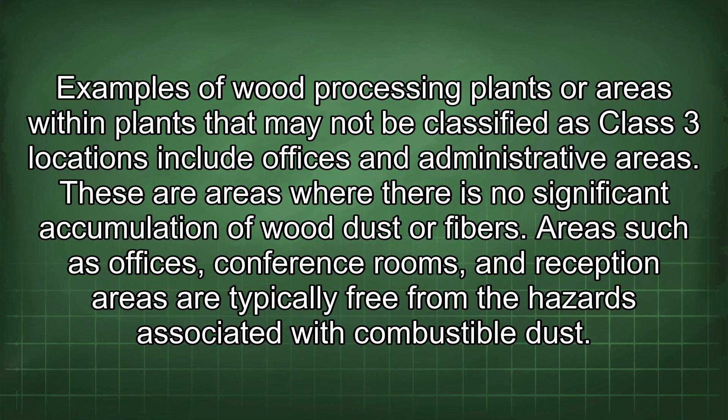However, not all wood processing plants are automatically classified as Class 3 locations. Several factors can influence the classification of a specific area within a wood processing facility. Examples of wood processing plants or areas within plants that may not be classified as Class 3 locations include offices and administrative areas. These are areas where there is no significant accumulation of wood dust or fibers. Areas such as offices, conference rooms, and reception areas are typically free from the hazards associated with combustible dust.

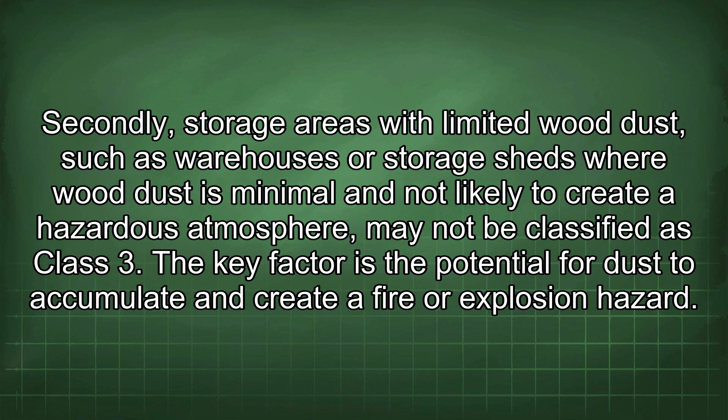Secondly, storage areas with limited wood dust, such as warehouses or storage sheds, where wood dust is minimal and not likely to create a hazardous atmosphere, may not be classified as Class 3. The key factor is the potential for dust to accumulate and create a fire or explosion hazard. Thirdly, woodworking shops with dust collection systems may not be classified as Class 3. Small woodworking shops or classrooms that have effective dust collection systems that prevent the accumulation of airborne dust are examples of this. These systems capture dust at the source, minimizing the risk of it becoming a hazard.

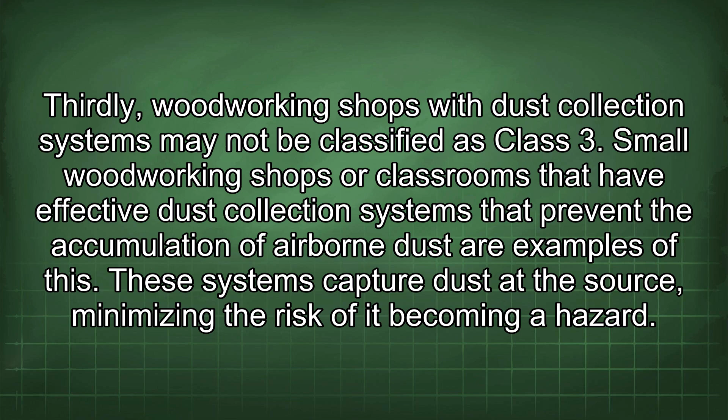Furthermore, sawmills with spark extinguishing systems may not be classified as Class 3. Sawmills that have installed approved spark extinguishing systems on all operating machinery significantly reduce the risk of sparks igniting wood dust. Spark extinguishing systems are designed to detect and suppress sparks before they can ignite combustible materials. It is important to emphasize that the classification of a wood processing plant as a Class 3 location or otherwise depends on the specific conditions and operations of the facility. Several factors must be considered when determining the appropriate classification.

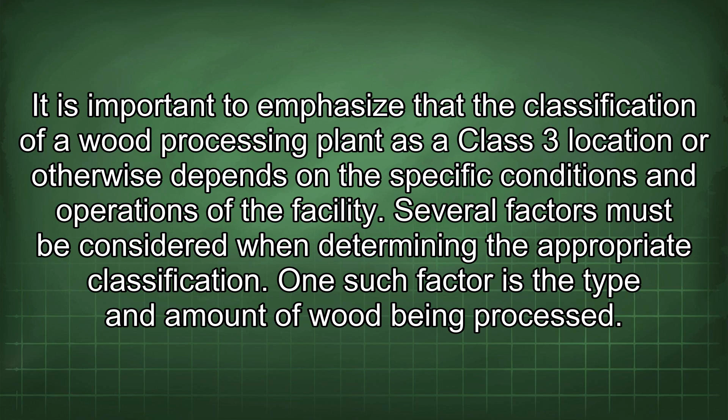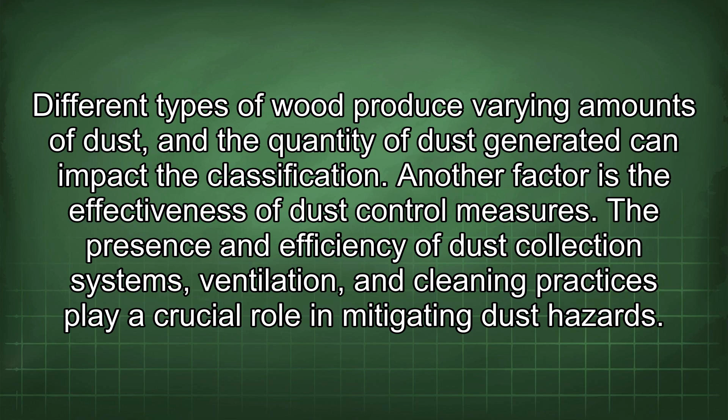One such factor is the type and amount of wood being processed. Different types of wood produce varying amounts of dust, and the quantity of dust generated can impact the classification. Another factor is the effectiveness of dust control measures. The presence and efficiency of dust collection systems, ventilation, and cleaning practices play a crucial role in mitigating dust hazards. The presence of potential ignition sources is another important factor. Electrical equipment, machinery, and other potential sources of ignition must be evaluated to determine the risk of igniting combustible dust. The applicable electrical codes and standards must also be considered. These codes provide specific requirements for electrical equipment and wiring in hazardous locations, including Class 3 locations.

It is strongly recommended to consult with an electrical engineer or qualified electrician to determine the appropriate location classification for a particular plant. These professionals have the expertise to assess the specific conditions and operations of the facility and apply the relevant codes and standards. They can also provide guidance on implementing appropriate safety measures to mitigate the risks associated with combustible dust. In summary, while sawmills are generally considered Class 3 locations, some wood processing plants or areas within plants may not be classified as such. The classification depends on factors such as the presence of dust, the effectiveness of dust control measures, and the presence of ignition sources. Consulting with a qualified professional is essential to ensure accurate classification and implementation of appropriate safety measures.

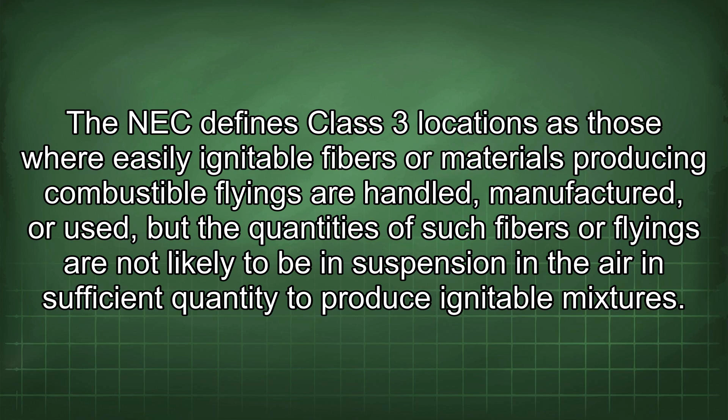The National Electrical Code, or NEC, provides guidelines for electrical installations in hazardous locations, including those with combustible dust. Specifically, Article 500 and subsequent articles address the requirements for Class 3 locations. These requirements cover aspects such as wiring methods, equipment selection, and grounding. The NEC defines Class 3 locations as those where easily ignitable fibers or materials producing combustible flyings are handled, manufactured, or used, but the quantities of such fibers or flyings are not likely to be in suspension in the air in sufficient quantity to produce ignitable mixtures. This distinction is important because it differentiates Class 3 locations from Class 1 and Class 2 locations, which involve flammable gases, vapors, and combustible dust suspended in the air, respectively.

In Class 3 locations, the risk is primarily from the accumulation of fibers or flyings on surfaces, where they can be ignited by heat, sparks, or other sources of ignition. Therefore, the NEC requirements for Class 3 locations focus on preventing the accumulation of these materials and minimizing the risk of ignition. One of the key requirements for Class 3 locations is the use of dust ignition-proof equipment. This type of equipment is designed to prevent the ingress of dust and to contain any internal explosions that may occur due to the presence of combustible dust. Dust ignition-proof equipment is typically enclosed in a robust housing with tight-fitting covers and seals.

Another important requirement is the proper sealing of conduit and fittings. This prevents dust from entering the electrical system and creating a potential ignition hazard.

The NEC also specifies requirements for wiring methods in Class 3 locations. Wiring must be installed in a manner that minimizes the accumulation of dust and prevents it from entering the conductors. Surface wiring is often preferred over concealed wiring, as it allows for easier inspection and cleaning.

Grounding is another critical aspect of electrical safety in Class 3 locations. Proper grounding helps to prevent the buildup of static electricity, which can be a source of ignition for combustible dust. The NEC provides specific requirements for grounding electrical equipment and systems in hazardous locations.

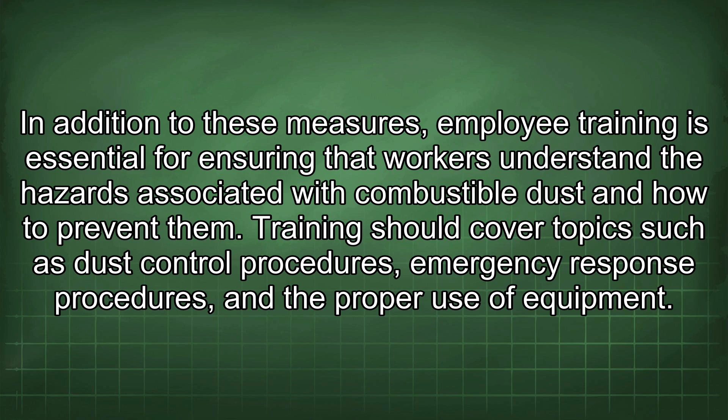It is important to note that the classification of a location as Class 3 or otherwise is not always straightforward. The specific conditions and operations of the facility must be carefully evaluated to determine the appropriate classification. Consulting with an electrical engineer or qualified electrician is essential for ensuring accurate classification and implementation of appropriate safety measures.

These professionals have the expertise to assess the specific conditions and operations of the facility and apply the relevant codes and standards. They can also provide guidance on implementing appropriate safety measures to mitigate the risks associated with combustible dust. The determination of whether a sawmill or any wood processing plant is considered a Class 3 location depends on a thorough assessment of several factors.

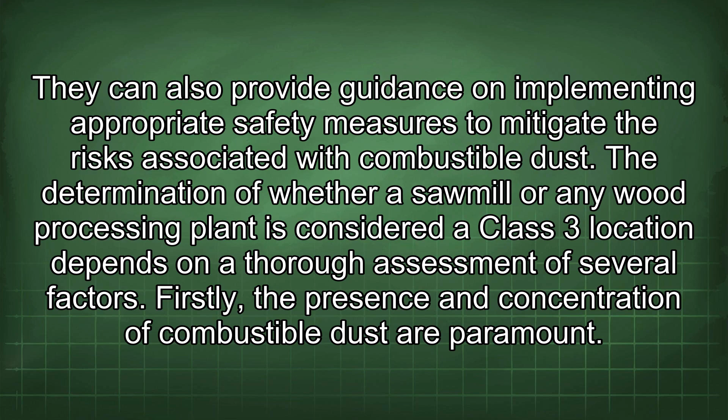Firstly, the presence and concentration of combustible dust are paramount. Class 3 locations, as defined by the National Electrical Code, are areas where easily ignitable fibers or materials producing combustible flyings are handled, manufactured, or used. However, the key distinction is that these fibers or flyings are not likely to be suspended in the air in sufficient quantities to produce ignitable mixtures. Instead, the hazard arises from the accumulation of these materials on surfaces where they can be ignited.

Secondly, the effectiveness of dust control measures plays a critical role. If a wood processing plant implements robust dust collection systems, ventilation, and cleaning practices that effectively minimize the accumulation of dust, the likelihood of the area being classified as Class 3 may decrease. Dust collection systems capture dust at its source, preventing it from becoming airborne and settling on surfaces. Ventilation systems remove dust from the air, reducing its concentration. Regular cleaning removes accumulated dust, preventing it from becoming a fire hazard.

Thirdly, the presence of potential ignition sources is a significant consideration. Electrical equipment, machinery, and other potential sources of ignition must be evaluated to determine the risk of igniting combustible dust. Equipment used in areas with combustible dust should be specifically designed and certified for such environments. This includes dust ignition-proof equipment, which prevents the ingress of dust and contains any internal explosions.

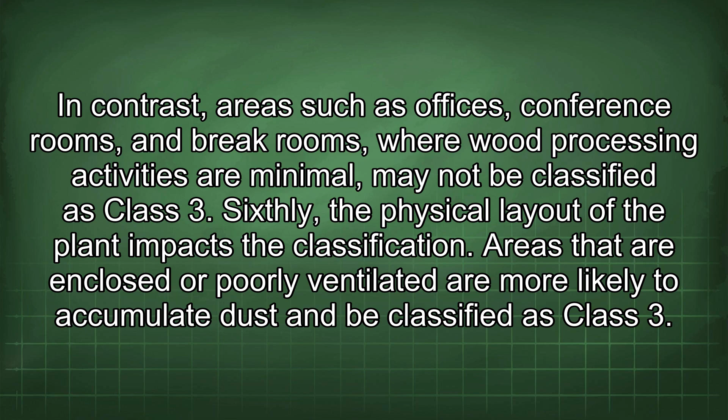Areas that are enclosed or poorly ventilated are more likely to accumulate dust and be classified as Class 3. Open areas with good ventilation may be less likely to be classified as such. Seventhly, the type of wood being processed can affect the classification. Certain types of wood may produce more dust than others, increasing the risk of fire or explosion.

Eighthly, the frequency and thoroughness of housekeeping practices are crucial. Regular cleaning and removal of accumulated dust can significantly reduce the risk of fire or explosion. Ninthly, the implementation of spark extinguishing systems can reduce the risk of sparks igniting wood dust. These systems detect and suppress sparks before they can ignite combustible materials.

Finally, documentation and record keeping are important for demonstrating compliance with safety standards. This includes maintaining records of dust control measures, equipment inspections, and employee training. Given these factors, it is crucial to consult with a qualified electrical engineer or safety professional to conduct a thorough assessment of the specific conditions and operations of the wood processing plant.

This assessment should consider all relevant factors and ensure compliance with applicable codes and standards. The engineer or safety professional can then provide a recommendation regarding the appropriate classification of the plant and any necessary safety measures. Wood dust is a significant fire and explosion hazard in wood processing facilities.

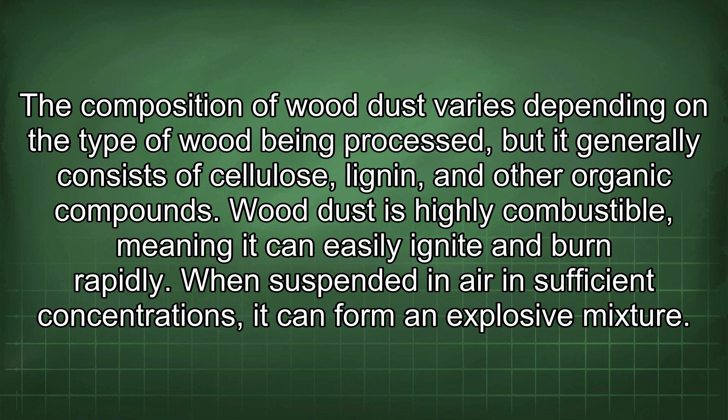It is a fine particulate matter generated during various woodworking operations such as sawing, sanding, and machining. The composition of wood dust varies depending on the type of wood being processed, but it generally consists of cellulose, lignin, and other organic compounds. Wood dust is highly combustible, meaning it can easily ignite and burn rapidly. When suspended in air in sufficient concentrations, it can form an explosive mixture.

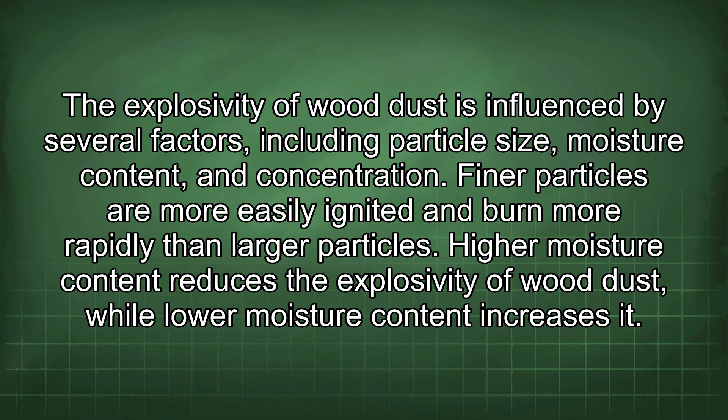The explosivity of wood dust is influenced by several factors, including particle size, moisture content, and concentration. Finer particles are more easily ignited and burn more rapidly than larger particles. Higher moisture content reduces the explosivity of wood dust, while low moisture content increases it. The minimum explosible concentration, or MEC, is the lowest concentration of wood dust in air that can support an explosion. The MEC for wood dust typically ranges from 30 to 50 grams per cubic meter.

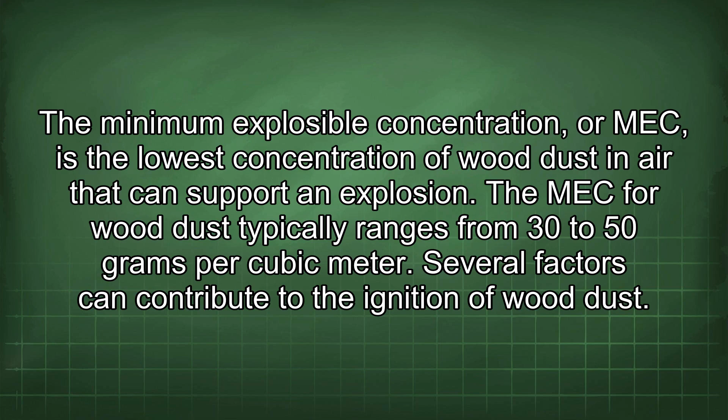Several factors can contribute to the ignition of wood dust. These include open flames, sparks, hot surfaces, and static electricity. Electrical equipment that is not properly designed and maintained can also be a source of ignition. To prevent fires and explosions in wood processing facilities, it is essential to implement effective dust control measures. These measures should focus on preventing the accumulation of wood dust and minimizing the risk of ignition.

Dust collection systems are a primary means of controlling wood dust. These systems capture dust at its source, preventing it from becoming airborne and settling on surfaces. Dust collectors typically consist of a hood or enclosure to capture the dust, a duct system to transport the dust, a filter to remove the dust from the air, and a fan to create airflow.

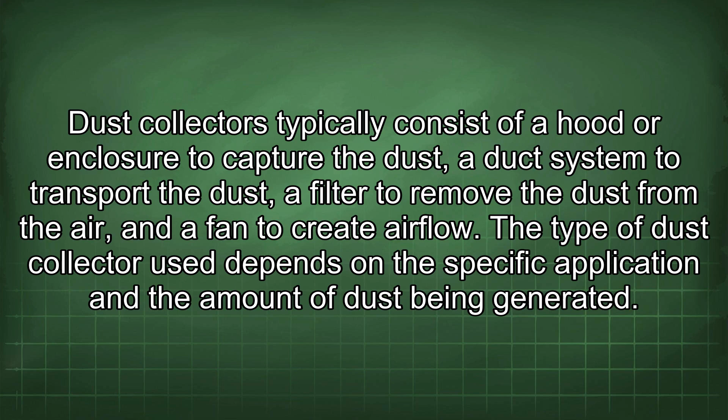The type of dust collector used depends on the specific application and the amount of dust being generated. Baghouse collectors are commonly used for high-volume dust collection, while cartridge collectors are suitable for smaller applications. Cyclone separators are often used as pre-filters to remove larger particles from the air before it enters the main dust collector. Ventilation is another important dust control measure.

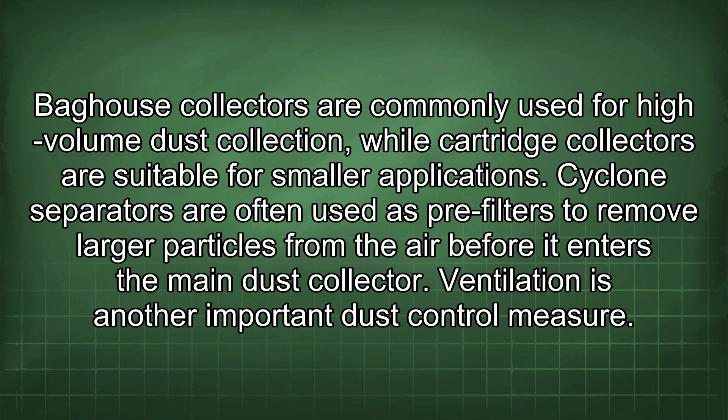Ventilation systems remove dust from the air and maintain a safe working environment. General ventilation systems provide a general dilution of dust in the air, while local exhaust ventilation systems capture dust at its source. Local exhaust ventilation systems are more effective at controlling dust than general ventilation systems.

Regular cleaning is essential for removing accumulated dust from surfaces. Dust should be removed using vacuum cleaners or other methods that do not create airborne dust. Compressed air should not be used to clean surfaces, as this can create a dust cloud that can be easily ignited. Housekeeping practices are also important for preventing the accumulation of wood dust. Work areas should be kept clean and free from clutter. Combustible material should be stored properly. Equipment should be regularly inspected and maintained.

Employee training is essential for ensuring that workers understand the hazards associated with wood dust and how to prevent them. Training should cover topics such as dust control procedures, emergency response procedures, and the proper use of equipment. In addition to these measures, spark extinguishing systems can be used to reduce the risk of sparks igniting wood dust. These systems detect and suppress sparks before they can ignite combustible materials.

Spark detectors are typically installed in the ductwork of dust collection systems. When a spark is detected, the system automatically activates a water spray or other extinguishing agent to suppress the spark. Combustible dusts pose a significant hazard in various industries, including wood processing, agriculture, and chemical manufacturing. Understanding the properties of combustible dusts and implementing effective control measures is essential for preventing fires and explosions.